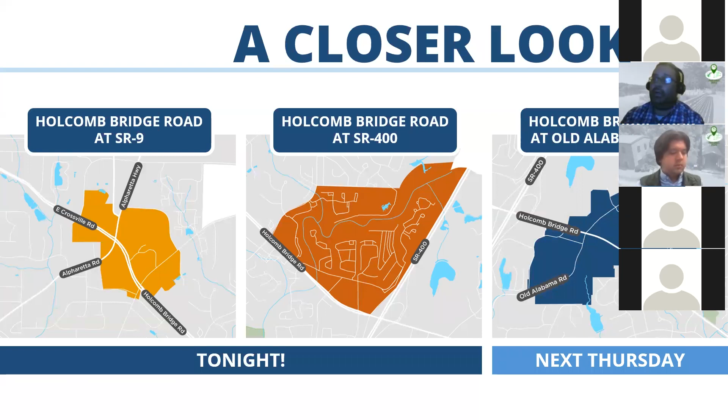And the way that this overall process works is, we've done a lot already to collect community input. We had a virtual community open house that hopefully a lot of you were able to participate in, where we asked a lot of broad questions about the community. We also have a stakeholder committee as part of this process with various folks identified by city leaders and other people within the community to help us, the consultant team, guide this process. So we're getting some more detailed input and advisement from that group as well.

But we're using all that to develop a vision. So that image you see there on the screen, those are actually some notes we took earlier today as part of our lunchtime session on these two nodes. And that really helps us develop a plan.

Ultimately, our goal is to build consensus. We know there's lots of different opinions out there in the community about the community as a whole, but certainly about these specific nodes. Our conversation earlier today, we definitely touched on some very different ideas about what we should and can be doing at these locations. So what we really aim to do here is find where there are areas of consensus, thread that needle so to speak, and make sure we're honoring a vision that makes sense for the community.

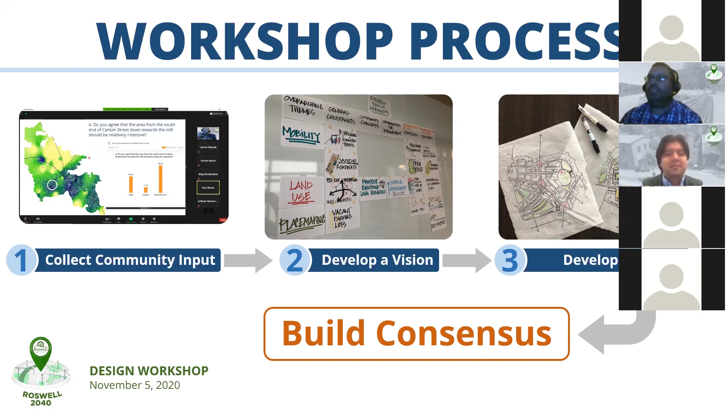All right, well with all that context, I am going to pass it over to Andrew Core to guide us in some facilitated discussion.

I guess real quick before I do that, just want to offer a little bit of a disclaimer about what we're doing. So we are jumping into these nodes. You're about to see some images and things of that nature that we've put together. A lot of this is stuff that we've put together in just the past few hours since our lunchtime session. So we want to remind everyone that what you're seeing and what we're about to present to you is very much a work in progress, and when we put it together, it was with the express purpose of making sure we get feedback from you.

So I don't want anyone to think that this is the final outcome of the work that we're doing. This is sort of a midstream point to make sure we're getting some input. It was also put together very quickly, just in the past few hours based on the input we received earlier today. So there's some details and things of that nature that may be a little wonky. That's, again, because it's a work in progress.

And then I will make one final disclaimer, that the final outcome of this is still a vision, right? So there may be some specific ideas and plans and items that are attached to the sub-area planning we're doing, but it's just that, it's a plan. We as the consultant team, and certainly City of Roswell, we don't own this land. All these properties are privately owned for the most part.

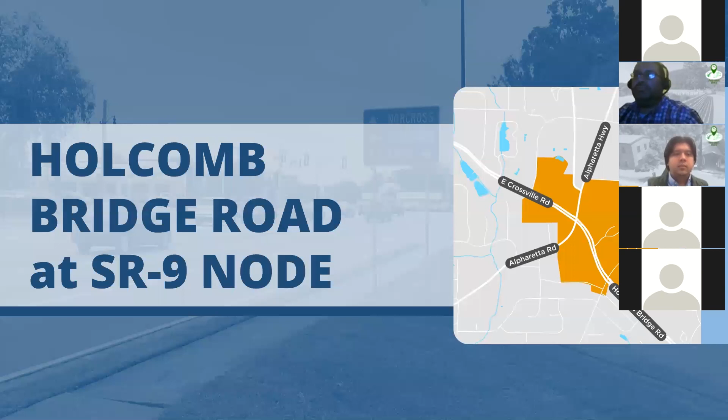Thank you, Eric. Again, I want to thank everyone who participated, generally from also today at the noon lunch. It was very informative and it helps us.

A couple of things I want to say about this process. Number one, it is iterative, meaning ongoing, it's changing, it's fluid. Number two, the reason we're doing it in this manner is because we can get quick feedback loops, so we can create an idea and test it to see if we're on the right track or if we need to make changes.

Secondly, what I want to say is it's high level. Eric reiterated that, so it is very high level. But with that, there are some intended outcomes I generally think are good, achievable goals for this kind of process at this high level, looking at a character area within a broader comprehensive plan.

I think the first thing is we want to develop a coherent story - a very high level story of what wants to happen in this particular character area. Secondly, we want to be able to communicate clearly what scale we want. We did that scale exercise this afternoon, but I encourage us to focus on the scale and think about what that looks like, not what's going to be in each individual building, or exactly what type or exact townhome look it's going to be, but a general idea of scale, which can really set a framework.

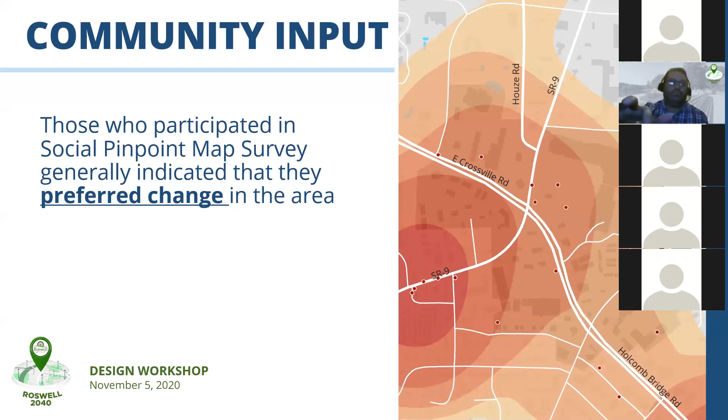Thirdly, from a scale standpoint, we talk about clarifying elements, one being development types - an exercise we did this afternoon. The second is public space, which we talked about - public space is critical, it's public infrastructure. And third, the streetscape - what does it look like, what does that public realm look like? Because as Eric said, this is private property. So our goal is to set the framework, set the tone, and then create an initiative and a path forward where we can use public investment and ideas in the public realm to influence good development and good redevelopment.

And finally, I think the way you walk away from this is saying - and I use air quotes - what are the public moves? Meaning, what can the City of Roswell do and its partners to make the needed changes to incentivize redevelopment and see the changes you all want to see? So that's really the goal here when we talk about these ideas and what we're trying to work through tonight.

So again, based on the community input from the social pinpoint map survey, generally people, as you can see, really wanted to push change in this area. You can see the intensity of the reds, saying yeah, we really want to see change over here. We used a dot exercise to really graphically map that. That's good to know. Next slide, please, Lauren.

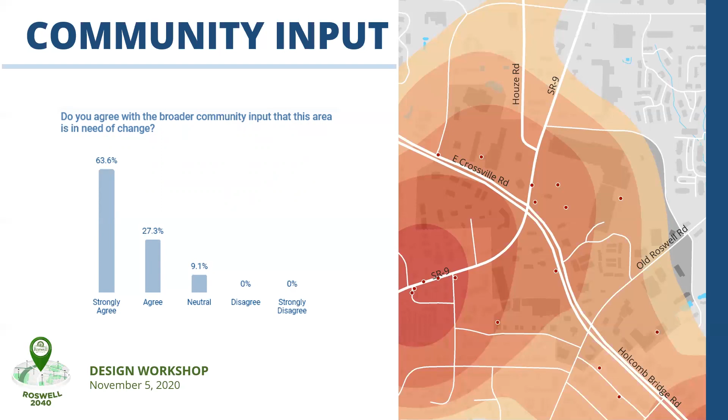And again, this just reiterates from this afternoon what we heard, that in general a majority of people really want to see change in this broader community. Just reiterates that with the public survey we did this afternoon at our noon meeting. Next slide.

To reiterate this idea of a town center, this is the term community scale I referred to recently. But again, through that idea, really people have landed on this idea of a town center, right? It's not suburban, it's not downtown Atlanta or midtown Atlanta, but it is a town center that has enough intensity and a mix of uses to make it a very vibrant, special place.

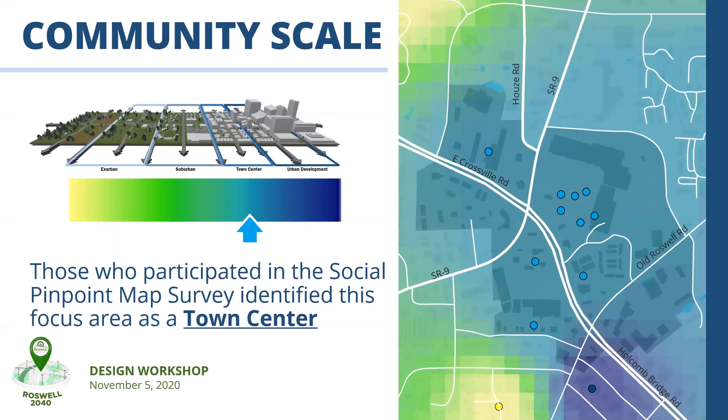Next slide. And again, as you can see, over 90%, really 100%, really see this as a town center as being a very appropriate scale that can be very successful in this environment and blend well within the surrounding environment. Next slide.

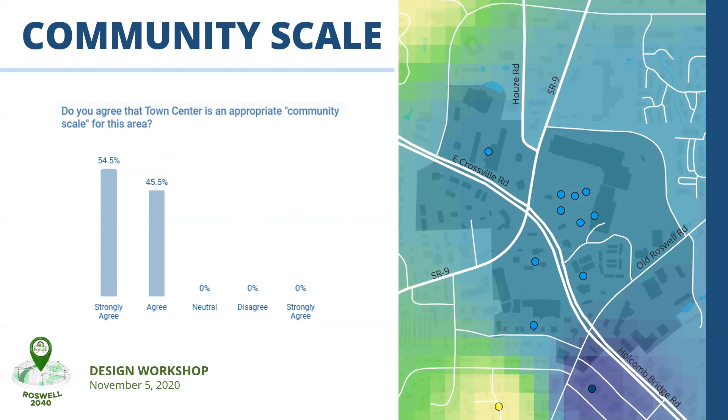And so our goal is to look at what do we retrofit or what would we remove. We went through an exercise of do we kind of do a retrofit idea and work with what we have, or look at something very different. So next slide, please.

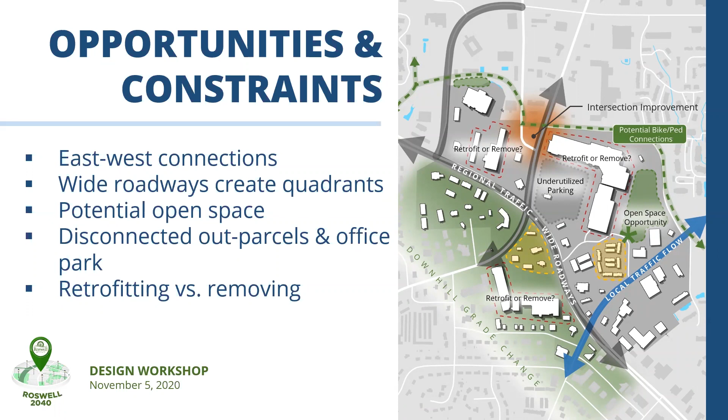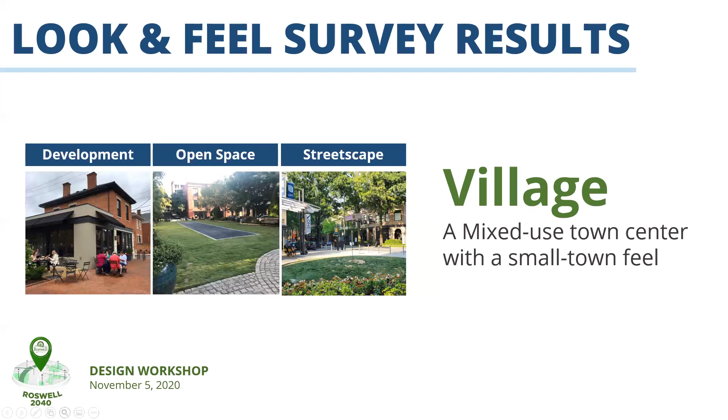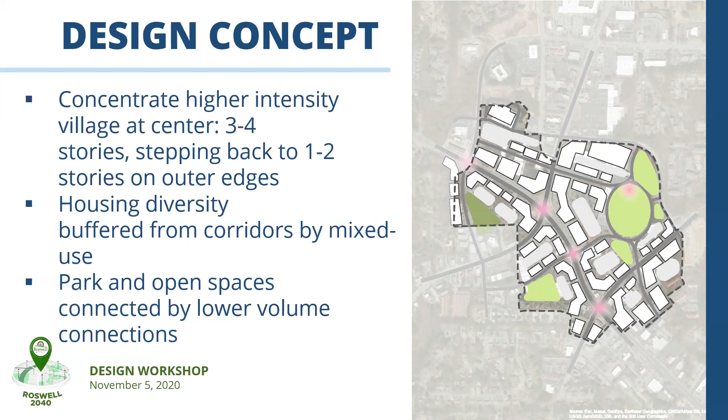In terms of vehicular circulation, we're introducing some cleaner connections. There's actually going to be a Houze Way coming across, and another connection as well, not shown here. Really creating a better hierarchy of roads, and considering the idea of right sizing of streets so they work well for all users, is really critical.

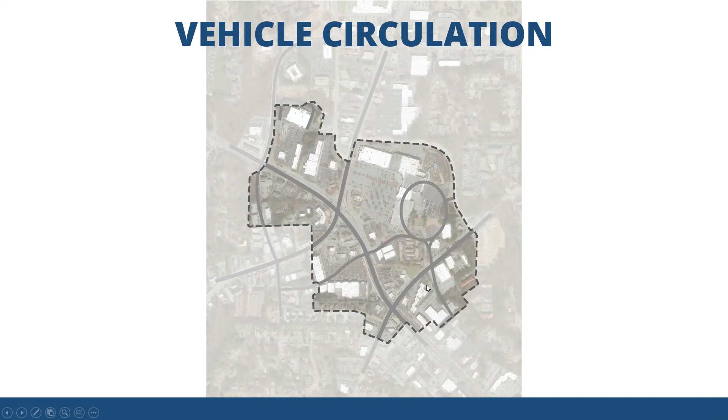Moving to open space, we always want meaningful open space, not just a pocket that no one uses. Here there's the idea of a central lawn with adjacent connectivity, but with some buffering to the adjacent neighborhoods and potentially some connectivity. This is where people can gather and do their things, but at a very human scale. The open space and network inform the development, and it's not on the major road but interior to the character area, which will gain greater use and more visibility, making it more valuable.

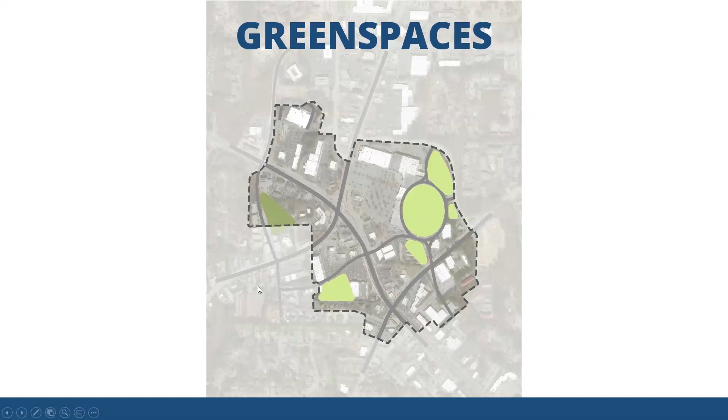Then there are these key nodes. They perform a lot of different functions, but importantly, they identify the boundaries of the character area, signaling that you're entering a special place and coming to a key intersection where meaningful development allows you to transition in and out of different spaces. It allows for opportunities for public art, wayfinding and signage, and the ability to link up land uses so they speak to one another well. That's the beginning point of breaking this down.

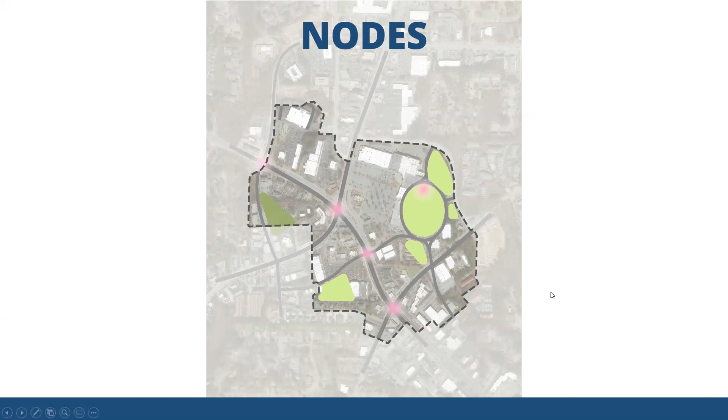And of course, the building, the verticality. So we've laid the foundation and now we build it up, strengthening those edges, working around that, thinking about that node, and then focusing on interior spaces, interior parking — that's where the parking goes.

So the parking's not the thing you see when you drive through. You have multi-sided development centered around open space, centered around interior uses, and it's walkable and very connected. And the buildings, as you can see, are human scale. They're not masses, so they're broken up, but they have different intensities.

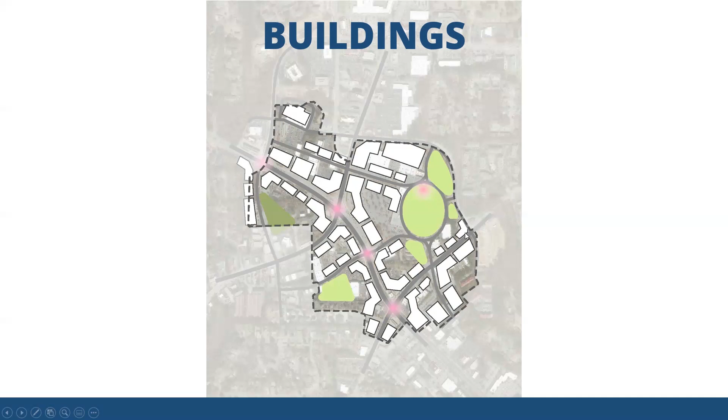And again, the land uses in here will be able to flex. We're not going to get into the nitty-gritty of exactly what's in each building, but the concept you can see is really a mixed-use town center at a reasonable scale, that village-type scale, that offers a lot of different options. These are just beginning ideas of what can take place here.

And finally, the parking spaces in those gray areas. When we think about parking, we want to make it work for the development, make it make sense, right? So they're not just parking because you have to meet a code — they're parking because it makes logical sense to perform the functions intended.

And they're located in places that are not just the face of the community — that's what you see when you drive up a major corridor — but things that can actually fit in and serve multiple functions.

These parking spaces are major infrastructure costs, so the thought is: can you use them and can they be multifunctional? Can you open them up for events and festivals? Can you link them to open space? How can you use them in multiple ways? That's important to consider as well.

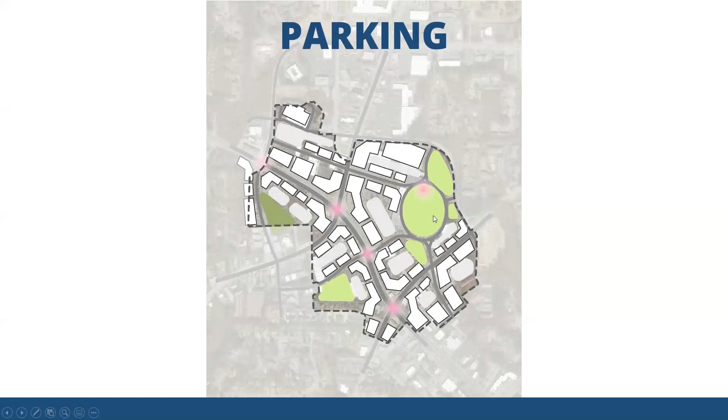And I think that's always one of those things we think about — better and more innovative ways to use the street, especially post-COVID, thinking about how we can flex streets and public spaces to generate economic sustainability and viability. That's really important.

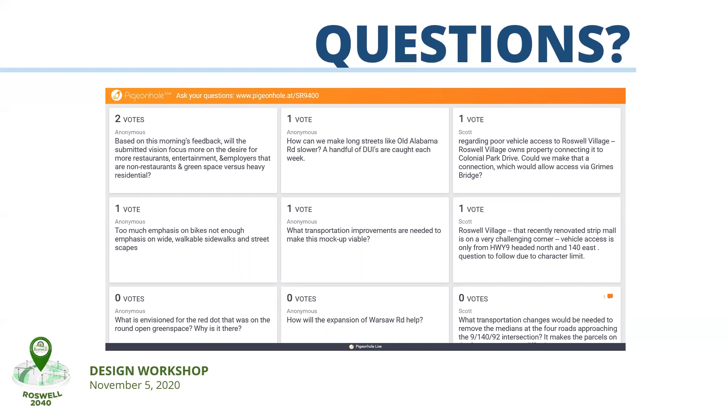Eric, I know you worked on some of the mobility options. Maybe you can answer this question better than I can.

Yeah, I think, broadly speaking, whenever we're talking about public investment, if that's the direction things would potentially go in terms of mobility options, obviously where the city already owns property or where there's less right-of-way or displacement impacts, or as Jackie mentioned, environmental impacts are always important as well, generally the path of least resistance is going to be taken. But to get to the heart of this question, what we're really trying to do here is lay out a broader redevelopment vision and then let the mobility piece tag along with that to help support that redevelopment vision. So I'll interpret this question as more of a statement that this is something we should potentially look into as an idea to pull into the vision.

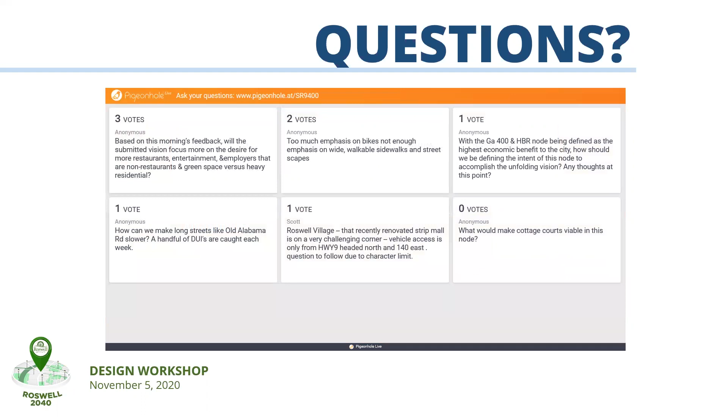I think we have this one in the top middle—we went through the one in the top left already. The one in the top middle says too much emphasis on bikes, not enough emphasis on wide walkable sidewalks and streetscapes. I think the primary reason we're talking about bikes is mainly because it came up in an earlier question. But with some of the imagery we have, and our understanding, we really want to make sure—and Andrew can speak to this much more elegantly than I can—we understand the street as a place, and what that means especially from a pedestrian experience, and what that means in terms of wide walkable sidewalks.

Andrew, do you have anything to add? Well, I think the reality is when you talk about the pedestrian experience and streetscape sidewalks, it's a complete package—it's not just 5 or 6 feet of concrete, it's more than that. It's a defining edge in terms of separating from, especially a very busy road. What does the edge look like? Is it buffered because it's a very busy road, or does it feel very connected to a low volume road? That's part of that story, that buffer. It's the width of the street and the width of sidewalks, varying based on the comfort level and scale. The materials used matter too—long-term, high quality materials that also instill a sense of place into the character of the area.

So that's part of the experience—it's wayfinding, knowing where you're going. It's one of the things I always challenge: putting benches in logical locations so they're useful, not simply dropping them every 50 feet, but making places where people can stop and sit and communicate with one another.

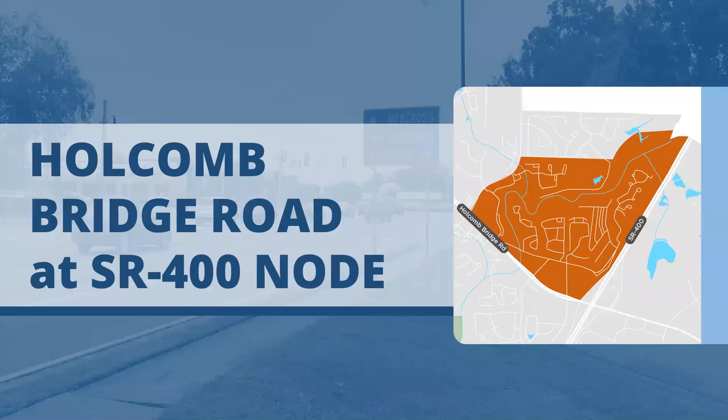We're going to shift, and as I mentioned, the idea is to think about—I'll reiterate—what's the coherent story we're telling? Does the scale align with the community value and what you want? And once you define that scale, the idea of clarifying elements, meaning development types, public space, and streetscapes. And finally, what are those public moves we can make?

We had a lot of great discussion this afternoon, and I appreciate everyone's feedback because it really helped clarify things. So this is kind of the tale of one character area—two different things are happening here. Obviously there's a lot of desire for change at the intersection. It's a highly visible corridor, a huge opportunity from a commercial and visibility standpoint for the city.

But it's also got the other side of the coin—a very wonderful greenway and watershed with Big Creek Greenway. So we have to think about those two things and balance. What we developed here is a vision that balances both and shows how they can successfully sync together. Next slide.

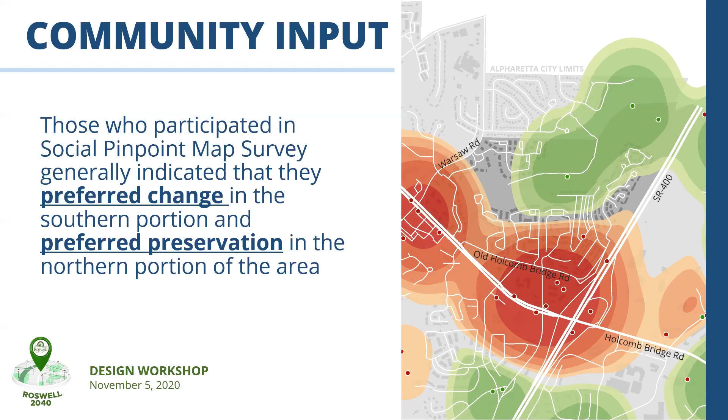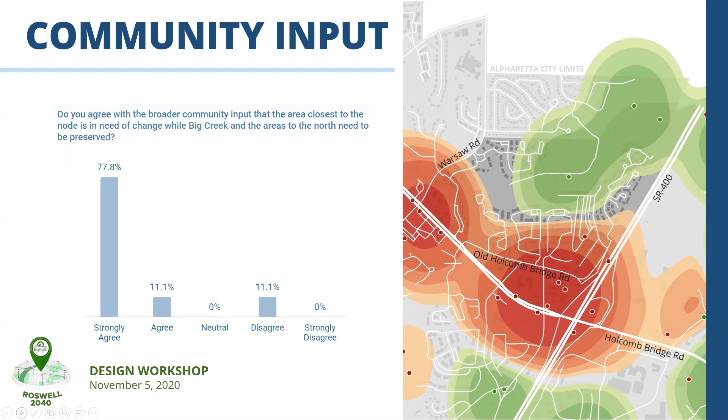Again, not surprisingly, the majority of people felt it was important to see the change and see this development pattern take place. What a lot of people said, and we heard this today very loud and clear, is: what is that scale between town center and urban development? How do we strike the right balance between the two? What does that mean, especially in the areas around 400 and Holcomb Bridge?

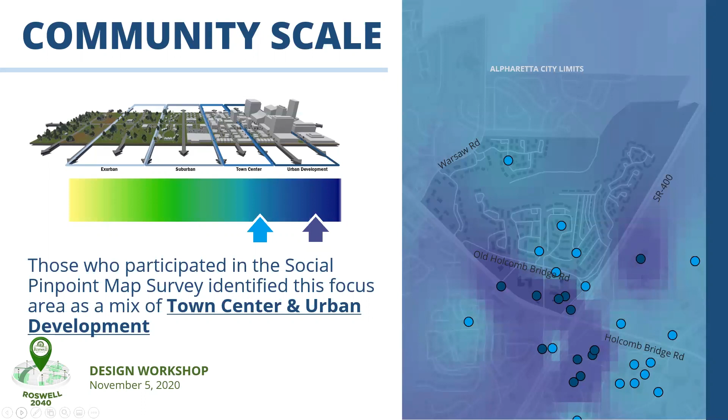Next slide. And again, this was reiterated today—people agree with what was shown and what was collected from Social Pinpoint.

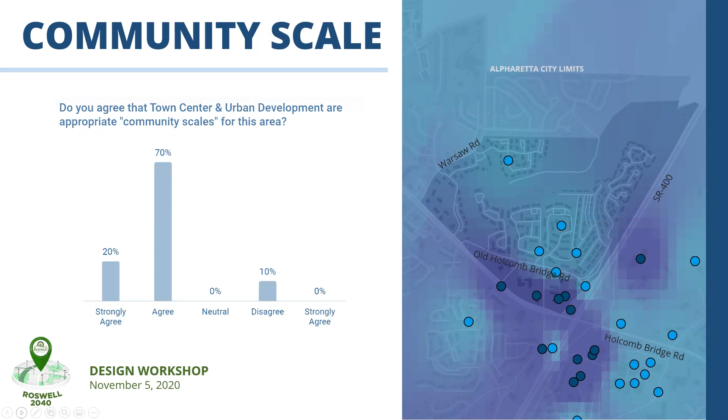So ultimately, we got to look at kind of look and feel results. How do you create development for a variety of uses? This is some of what we heard before: open spaces for a broader community, and when we think about residential and streetscape, you have external streetscapes, but also public spaces to share amongst one another.

That's vibrant, and we said town center, but really it's a gateway node, a gateway community. We're going to be dealing with the other catty-corner intersection next week, so we don't want to work in a vacuum. We want to think about this holistically, how they all connect together. But this is a starting point.

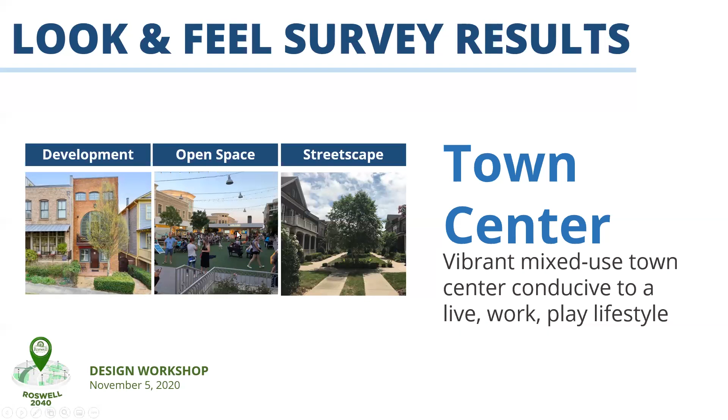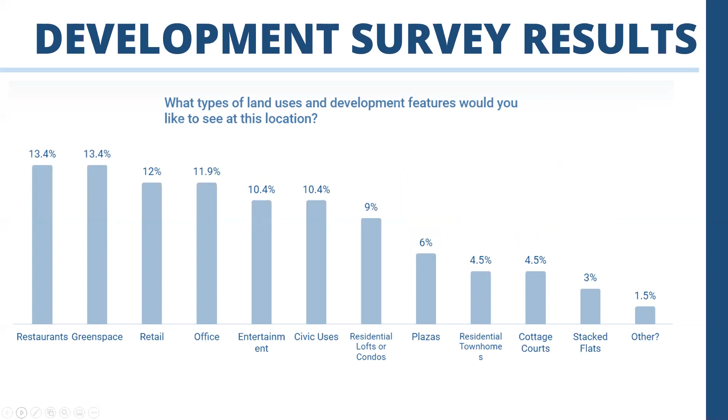As you might suspect, similar to the other one, there are lots of ideas for what people would like to see here, ranging from restaurants all the way to civic uses—a variety of different options.

In terms of the design concept, one of the things we heard is that we really want to take advantage of the intersections that come off here. What can be done here now? So here's the balancing act we're trying to find: first and foremost, what's the theme and story here? Is there an opportunity? And we heard the word campus.

The opportunity to look at not just corporate office, because that means everything closes up at 5 p.m., but an emphasis on something distinctive to this corridor to draw different types of users—whether it's IT, a corporate headquarters, medical supplies, or even innovative uses with small laboratories where younger professionals want to do that type of work.

So the reality is we heard a lot of that, and we think it has validity to the degree that it's not strictly an office park that dies at 5 p.m. We've got to make it viable to work year-round, and make it flexible enough.

The word eco-district or innovation district is often overused, but it plants a seed in your brain—that could be something here because of its connection to 400, connection to Holcomb Bridge, its visibility. But the real attraction is the Big Creek Greenway, and the opportunity that the Big Creek Parkway is coming through here as well. That helps establish the footprint through here.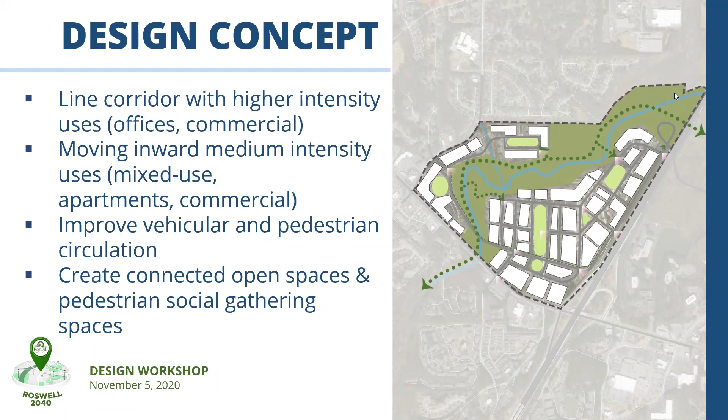So a big key theme is conservation. You have an area of land that's heavily wetland. It's got a creek, but you have access to nature. This helps define—if you look at this and nothing else, take away—you have two defined sets of this character: south and east, north and west.

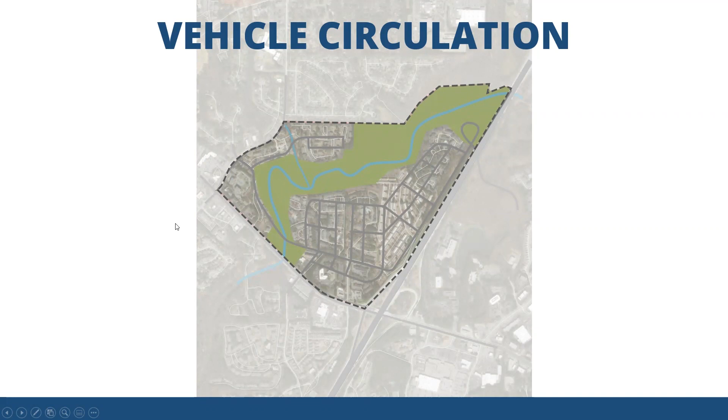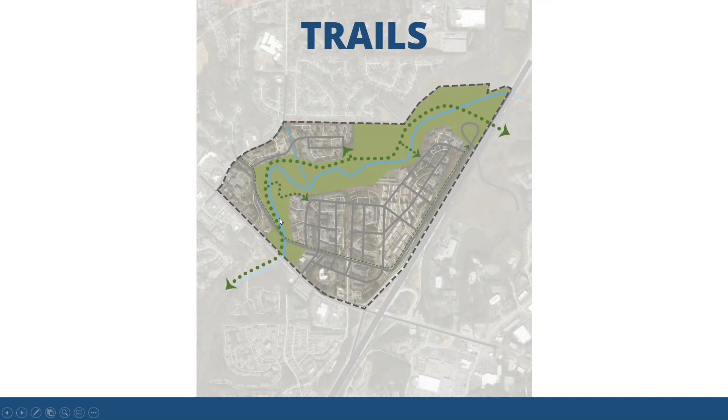The trails—obviously with Big Creek Parkway, there are bicycle and pedestrian amenities on the parkway, so that builds it out. But there's also a real opportunity to continue and build out at least a segment of the greenway within this space. Imagine having the ability, if you're working here, to get on the greenway within a quarter mile and get access to health, access to trails. It's really going to be a public health benefit in this area, and it's going to be a major draw for both employers, employees, and potential residents.

When we talk about building footprint, you begin blocking out areas that could be developed, getting away from super blocks, creating manageable spaces that are human scale, but increasing that intensity especially on the interchange along Holcomb Bridge. That frames the core for you, but then to the interior, it takes on a different scale. You have to consider the topographic changes and the relationship from the buildings, whether residential or commercial, to the greenway. It's a real advantage, so how do you take advantage of those view sheds, the visibility, and the connectivity?

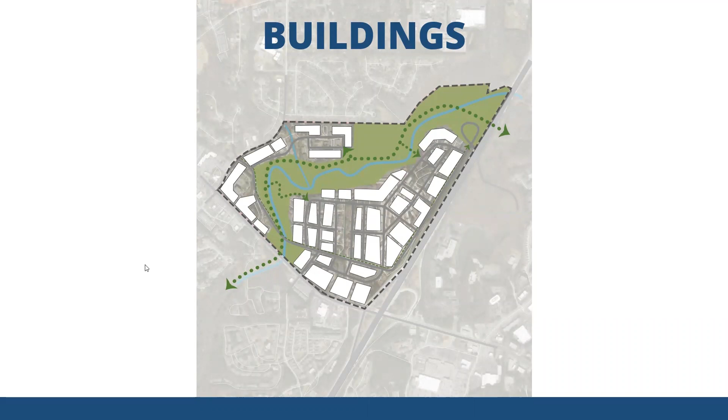And green space, I always want to say intentional green space. Here you have a series of different green spaces, all functioning with a slightly different use. That one up at the top could be a potential area for residential, broken up, maybe townhomes, smaller scale. Don't think of the block as a building, it could be broken up into smaller residential spaces since it backs up to residential anyway. It's far enough away from the larger, dense, intense buildings, but still very walkable and connected, with a central green space for them.

If you go to the west at the corner, you've got this. This really is a central space, a central gathering space that directly looks out. Potentially it could be an amphitheater, looking out towards Big Creek Greenway, creating a number of different opportunities.

Are there some civic uses in that corridor that transition from residential at the north to more of the commercial and larger innovation district to the south and east? Then you have interior green spaces, which are a unifying feature linking both sides of the parkway, which is important. Up to the top right, whether it's residential or other uses, you have a central green space that functions maybe as playgrounds, active play. If residential, maybe it's simply access with a different use. So they all have intentionality, and they function and serve different groups of people, but they can be linked through the greenway itself and through the road network.

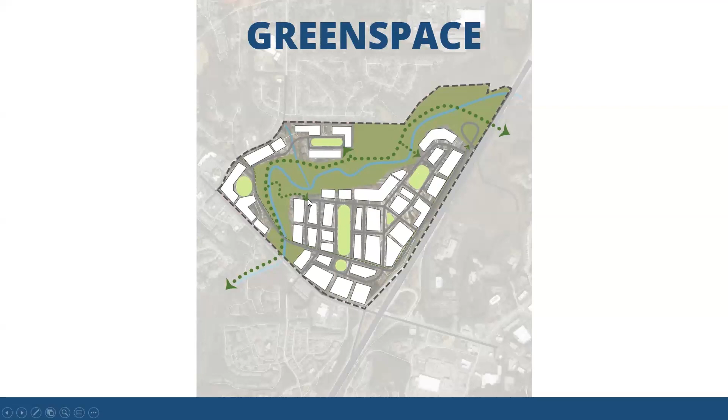It's a little bit different there. You can see some of these little pink nodes in different areas. Nodes are areas of activity where different things come together, whether it's key intersections, visibility, access off the parkway. These are key areas, maybe access into the site, opportunities to do something, opportunities for wayfinding, for signage. And of course, you have the intersection too, that strong corner. Bringing people in, introducing public arts, there's something special happening here. It's a transition of space, of uses. All these things are happening at these nodes, so we want to think about nodes of intentionality.